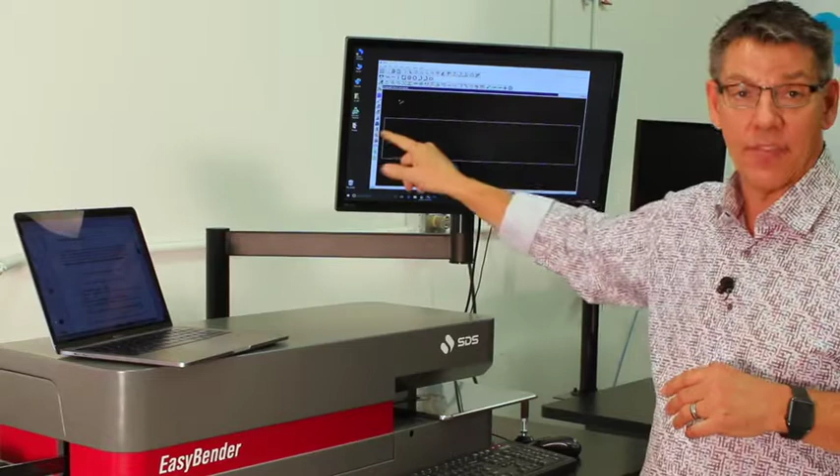It's a pretty simple process. What I've done here, and this rectangle that's up on the screen right here, if you don't have a rectangle that your CAD department's given you, you can draw one, and it gives you step-by-step instructions right here on how to do it. I did it really fast and got it up on the screen. And what we want is a 100 millimeter line. That's what we're after. We're going to get a line segment on your screen that's 100 millimeters long, and we're going to run that piece and then measure that, what the machine gives us against what it thinks it gave us against what it actually does.

So here's the sequence. We've already got the box up there, and you're just going to go ahead and run it like you would any part. You're going to go ahead and select your beginning and the end of your line segment and get your dialog box up that you're very familiar with when you're running a die.

You want to make sure you're straight cut, no miters, because the miter tip would get in the way. And very important, make sure you're not adding or subtracting any rule to the end of your cuts, so that it's 0, 0 on there.

No problem, go ahead and tell it that looks good. We're going to run it. And here we go, the machine is producing that part.

Now what you want to do is take the part that is supposed to be 100 millimeters and measure it. Get a pair of digital calipers, and we're going to go ahead and see what it gave us. Taking those digital calipers, we're going to measure that. And it did not give us a piece of 100 millimeters.

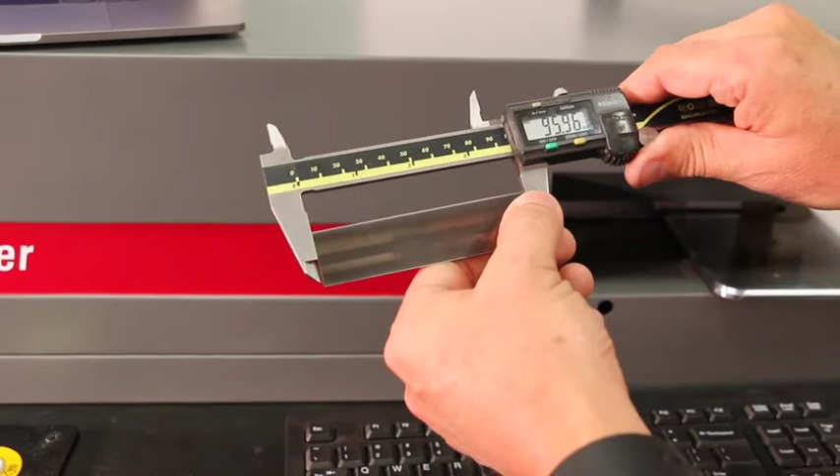Now, I went ahead and told it not to. I intentionally set it so it would be wrong, so I can show you how to fix it. So in this case, it is wrong. It is 95.96 millimeters, when it was supposed to be 100.

So what do you do when you find that it's this way? You keep that measurement right there, because we need to know that. 95.96. What you do next is go right over here to the configuration icon at the top of the screen, the little wrench, and you click on that, and you get your configuration dialog box to pop up.

Jump over to parameter 2, tab 2, and you want to enter in the password right here, SDS, into the keyboard, hit enter, and then go back to tab 1.

What you're looking for is right here in this section on the left side, the calibration pulse window. You want to go ahead and highlight over that and enter 100, because we're using a 100 millimeter piece.

And then in this dialog box right here, we're going to enter in what it actually gave us. So it gave us, as we had already seen previously, 95.96. So after you've done that and you've got the amount entered in that it gave you, you just jump down to the bottom right-hand corner of the screen and hit apply.

And then after you hit apply, then you go right next door and hit OK. And there it is, so it's taken what it thinks should be the correction.

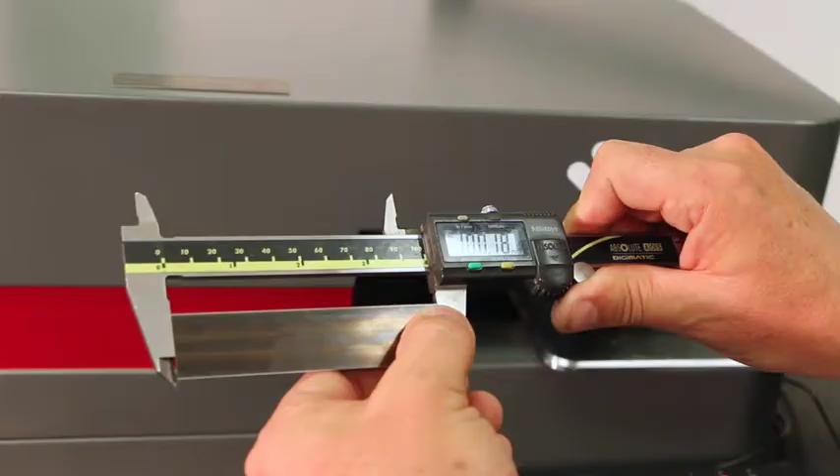We just run it again and see what it gives us. So in this case, we're going to go over here and run it again. All right, it's closer, but it's not exactly right. So I'm going to go through the sequence one more time to get it to zero in and get that right where it needs to be.

Okay, so here we go, we're going to do it again. I'll just talk it out loud real quick. Go to the configuration, go to tab 2, enter the password SDS, hit enter, go back to parameter 1, go down to pulse calibration, put in 100 because that's the piece it should have given us, go down to the window just below, right next to the run, and put in the amount it gave us, which was 100.18.

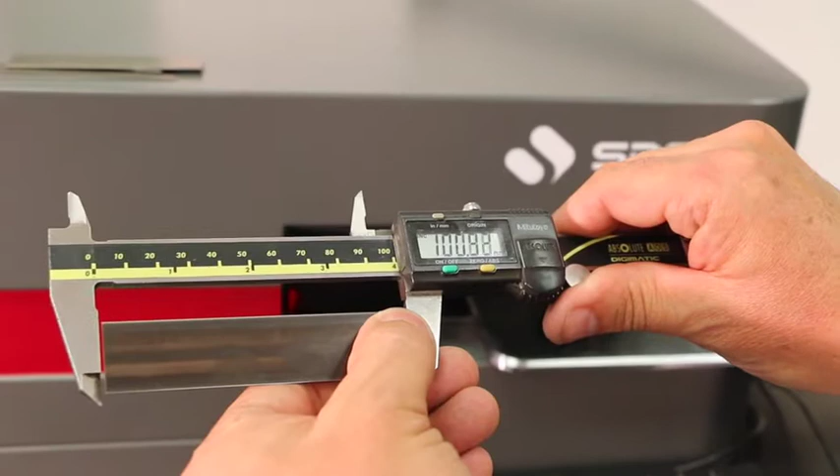And I'm going to hit apply in the bottom right-hand corner, hit OK, and there. Now we'll go ahead and run this again and see what it gives us. Okay, here we go, moment of truth. And get that in there, and there it is. 100 millimeters, spot on. This machine is accurate within plus or minus 5/1000ths of an inch.

Of course, we're dealing in millimeters here, but there it is, it's spot on, and that's how accurate these machines are. Well, there it is, that's it. That's how you do length calibration. Not too painful at all, pretty simple and very important. So let's move on to the next sequence in calibration.

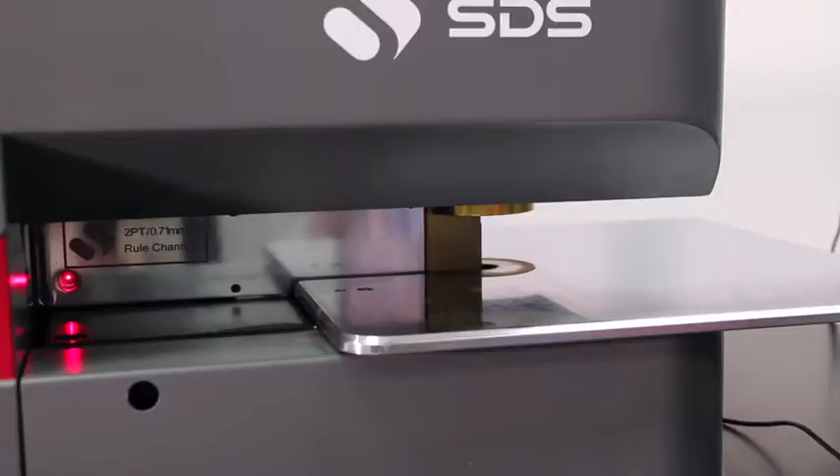All right, welcome to section 1.2, nozzle guide calibration. Now, the reason we do nozzle guide calibration is it all has to do with that nozzle at the end. What the nozzle guide calibration is all about is, the end of the nozzle over time is going to get wear on one side or the other.

And if that wear that happens over time is going to affect the distance, let me open up the lid here for you, the distance over to that miter station.

Let me get something to point with. To right here, that last tool, which is the miter, the distance between that tool and the edge of the nozzle right here, that distance will change over time. Because these machines are so accurate, we want to calibrate to that distance, because if that's off, you're going to have one leg of a bent shape shorter than the other as you're bending around. So we can calibrate for wear and that distance.

Also, if this block is not put in snug, if it's shifted over, that can change that as well. So anytime you insert and reinstall a tool block, you want to make sure that you're all the way over against the rule channel so that this distance stays consistent. Now in this case, we want to calibrate for any potential wear.

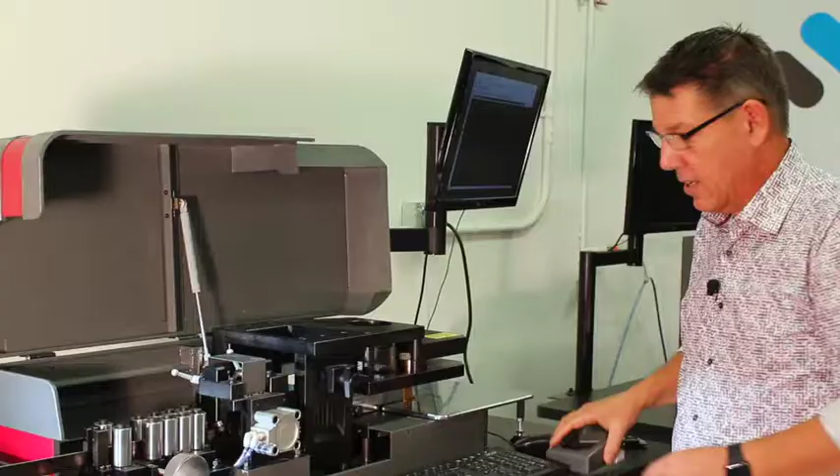All right, so let's just throw this all back together real quick, and we're going to run a piece of bent rule so that we can do, let me grab my other computer here. It's got my calibration manual on there. Get that opened up, and it'll give us our step-by-step directions.

Okay, so what we want to do is, and in the manual, it again tells you exactly how you can draw this square, and what we want this square to be is 30 millimeters by 30 millimeter legs all the way around from here to here to here, equal on all sides.

So we're going to go ahead, and what we want to do is we want to run a segment from here around this direction, and that's very important, that you start here, going this direction, going around and ending here. You're not doing anything with this line segment.

So here we go. We're going to go ahead and tell it to start our path here, going down to here, ending our line there. We'll get our dialog box, making sure we're straight cut, nothing here and here on length, adding or subtracting. And we're going to go ahead and run the piece.

And it's going to bend that shape for us. Paying attention to how it ran through the machine as it came through, this would have been the first piece off right here. This would have been the last piece out.

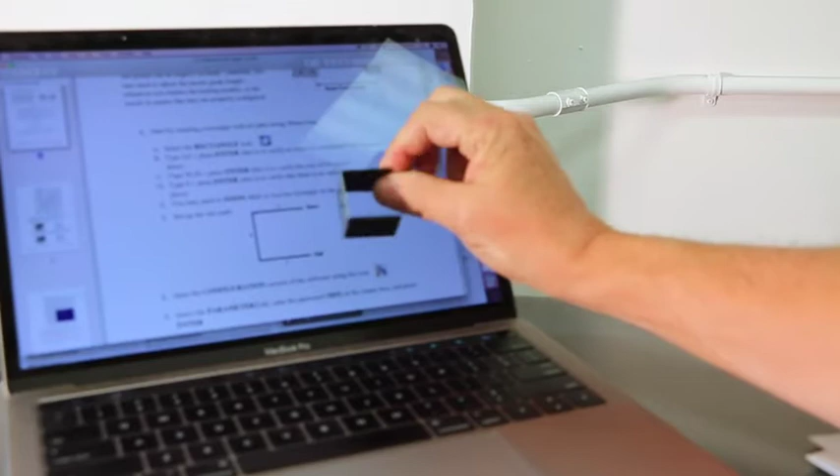So this leg, according to the manual, is section A, leg A. This is B and this is C. A, B, and C. Now that matters because as you read the manual, it's going to talk to you about legs A and C. B doesn't really have any concern to us, but A and C do.

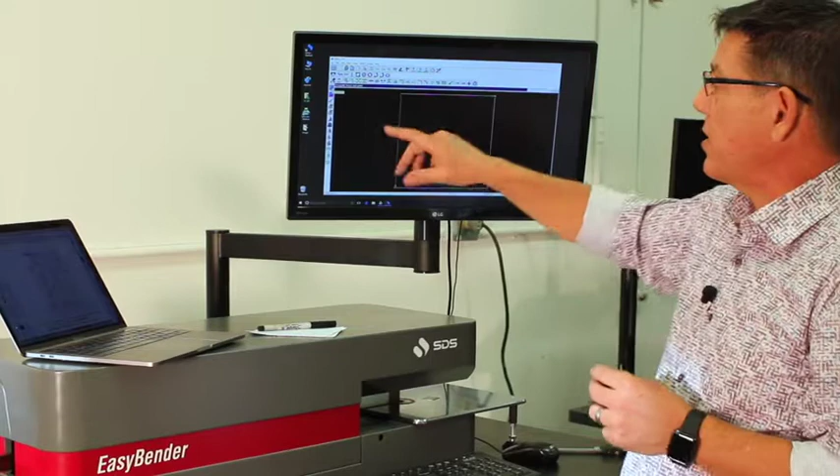All right, now that we've got the piece run, all we want to do is go back to our configuration, just like we did before when we ran the length calibration. It's the little wrench right there. Get that to pop up. You got to go through the same sequence every time.

You got to open up the software. You got to go to parameter 2 right there. Go down to the password, SDS, enter, go back to parameter 1, and we get the screen open. And right here in the configuration window, right here in this little section is the nozzle guide, left and right. So you've got these 4 dialog boxes right here inside of nozzle guide, and we're going to go ahead and get started inputting some measurements into these windows.

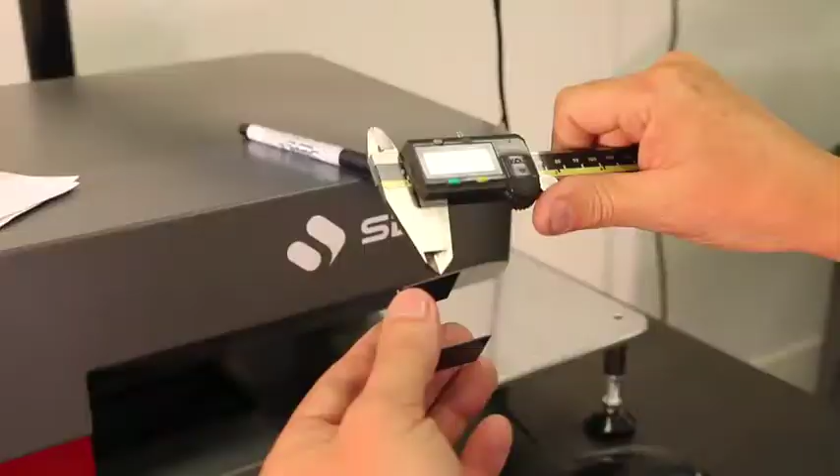Okay, so what we want to do is take leg A and we want to measure that first. And you take the back of the rule here, you put it into your caliper, and you just dial that over. We want to hold that tight right there, and we want to see what that leg A measures out to be. And it measures out to be 30.43. So I'm going to write that down.

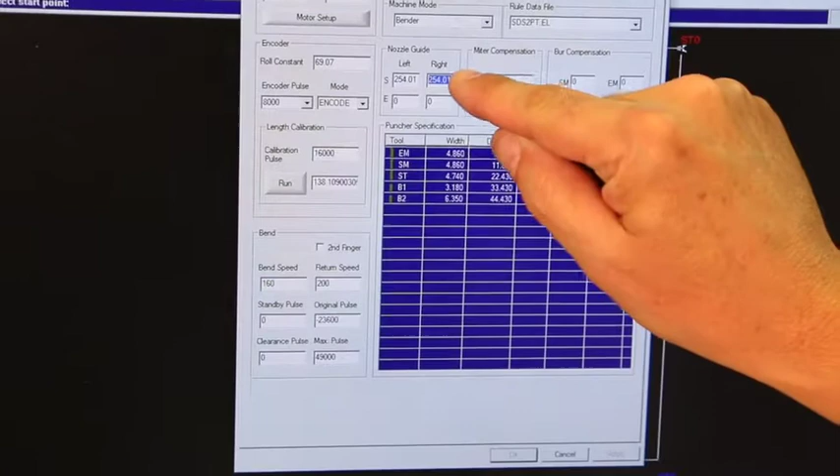30.43. I'm going to go ahead and enter that value right here into this section, the right side of that window. Let me get out of the way so my fat finger's not in the way.

30.43. Now I want to go ahead and measure the other leg. I'm going to take this same pattern, hold the calipers against there, and measure leg C, and that came out at 30.28. I'm going to enter that into the dialog box right below where we just were.

So I should have wrote it down - got to write those things down. 30.28, and there it is. Then all I have to do is go down here and hit apply, and it adjusts the numbers right here.

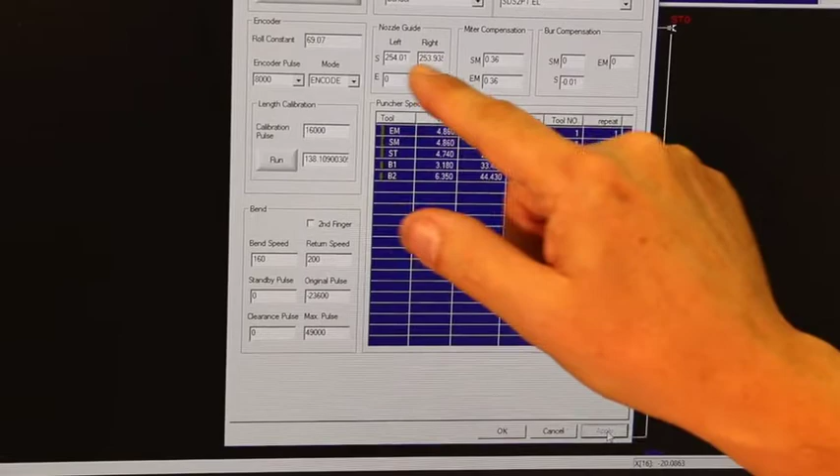The last thing you have to do is after you've hit apply, you need to come up here and check these two boxes, and manually change the data underneath whatever's in the word left. The numbers under left must match whatever is on the right, and it doesn't. So I'm going to highlight whatever's on the left and manually type in whatever's on the right.

In this case, that would be 253.935. So we've got that first segment done. We're going to rerun it and see how close we got. We've already got it all plotted out, so we're just going to run the same piece again and see what we get.

Okay, again remembering which piece came out first, right here, that's leg A. If we're spot on, those two legs are going to be the same distance. This one's 30.33. Moment of truth, flip it over, do the last leg out, leg C. That's 30.29.

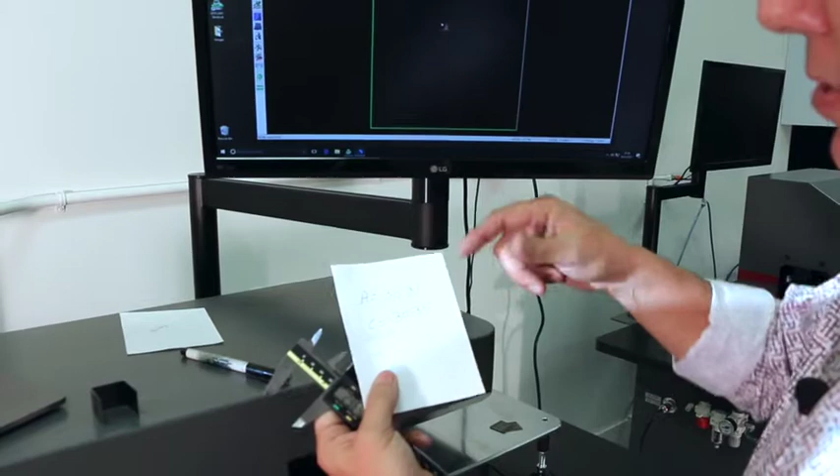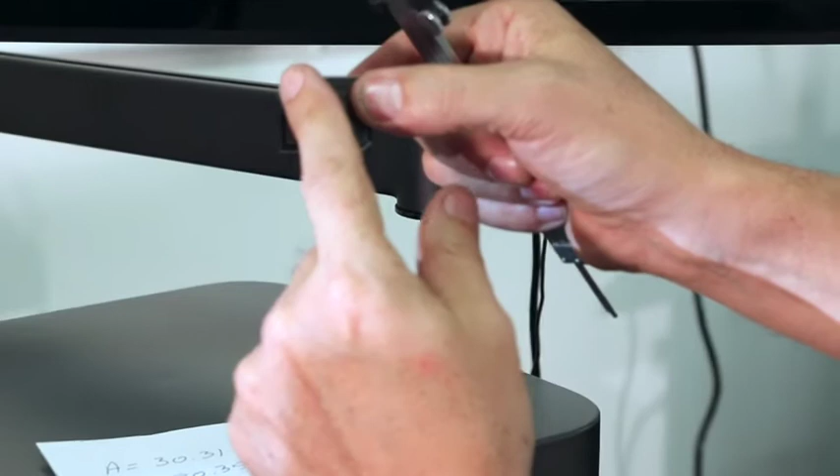I neglected to give you one important tip - when you're measuring these, you want to measure up as close to the cut bevel as possible. You don't want to measure down at the bottom of the rule, because in some of your tool blocks out there, there's a slight taper going, I'll over-exaggerate, going this way. So it may not be an exactly straight cut, and that's by design. If you're going to get this right, you want to be measuring at the top of the bevel on A and the top of the bevel on C.

All right, let's go back into our configuration, go to parameter 2. Let's get our password back in there, SDS, enter. We're going to hit back to parameter 1, and there we are back to our nozzle guide, left and right.

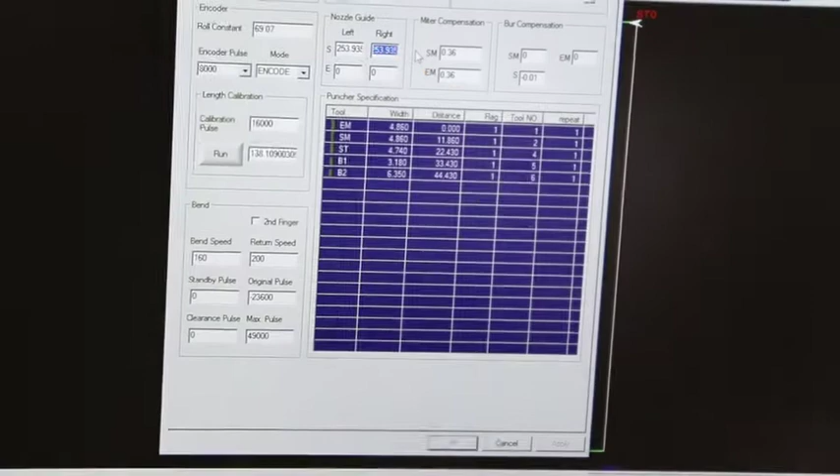We're going to go over to the right side and put in what A was, and A was 30.31. We're going to go down here underneath it and put in what the value C was, which was 30.35, and we're going to hit apply.

Going back up here, again, remember these two values need to match. We need to check that the left value matches the right, and it's really close, but not quite right. So we're going to highlight the left value and type in what we see on the right, and in this case that is 253.955. Go down again and hit apply, and okay, we're done.

And we'll check it one more time. All right, remembering how it came off, this is A, this is C. So let's go ahead, measuring up by the top of the bevel, just to make sure we don't get that taper in the way.

Okay, A equals 30.31, and C is 30.31. It's spot on, exactly right. Leg A and leg C now match.

This is important - if you can imagine, when you're going to knife a die and want to put this piece up against another piece of rule, you don't want one leg shorter than the other. This is an accurate machine. Let's move on to our next section.

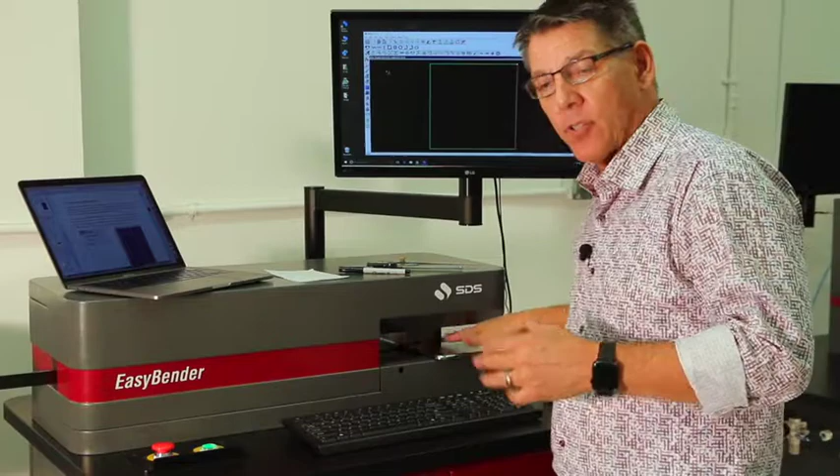Now, the reason we do a center machine origin is there's wear on this tooling. Specifically over here by the nozzle, you've got those bending posts, or fingers, that come up and down next to the nozzle that cause the bender to bend. Now over time, those fingers get worn from tapping the rule, so it affects where the origin or the center of the machine is.

So the gear set can wear over time. The nozzle gets a little worn on one side. The fingers can get a little worn. Maybe the left may wear a little differently than the right side if you have the tendency to bend one direction all the time. So you can kind of get everything back on center.

Now this is really important to do first before you do your arcs, your radiuses, and your angles. You need to do this bend origin first. Now the ideal way to test the machine origin is to bend a piece of rule 30 degrees to the left and 30 degrees to the right. So here's how we find out how to do that.

What we want to do is go over here, right up here to settings, and we want to do that pull down on settings, and then on the third one down it says teach, and we're going to hit teach, and there it's going to pull up this field, and you want to look right here.

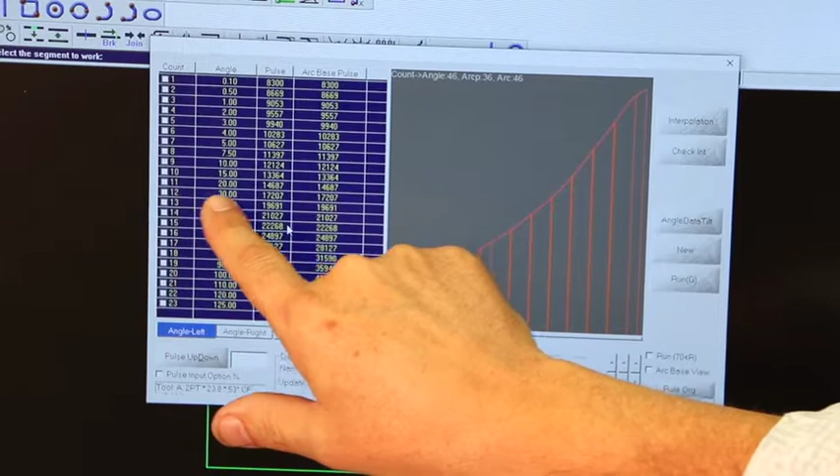We're after the 30 degree, and right there, we want to write that number down in the pulse column. So 30 degree pulse, we're going to jot this down, is 17,207. That's the pulse that the machine is currently using in order to produce a 30 degree to the left and the right. Okay, we're going to go ahead and close this down because we don't need it anymore, we got the number that we need.

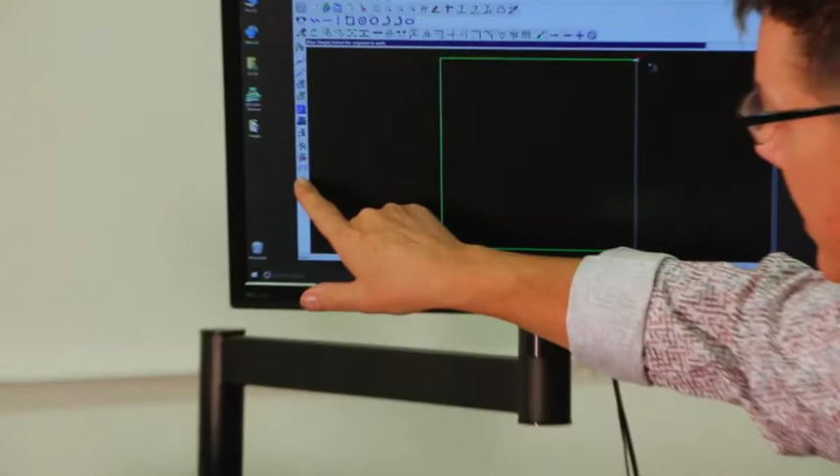We're going to close that dialog box. Now next, let me jump over here to our book, and it tells us what we want to do is go to the manual operation. And where you find manual operation is over on the left-hand side, all the way, second from the bottom, is a little green gear. You want to just tap that green gear right here, and it pulls up this dialog box.

So right here, over on this side of the dialog box, is this area called Bend Origin. And what you want to do is just hit Bend Origin, and it's going to ask you if you want to save the origin data. Just tell it yes.

Okay, now that we've done the Bend Origin, what we want to do is head right over here next to the other side of this dialog box, and it's got this area that says Test Bend. And just below Test Bend, it says Test Pulse. And this is where we want to enter in that number that we copied down earlier for the 30 degree pulse to the left and the right.

So what we do is highlight that, and we enter in that number, 17,000, and your number may be radically different, so don't use my number, use the number that was on your screen, okay? And so you put that in, and then jump down right below it, and it says both. And you hit that icon, both, and it's going to put two pieces out, 30 degrees, one to the left, one to the right.

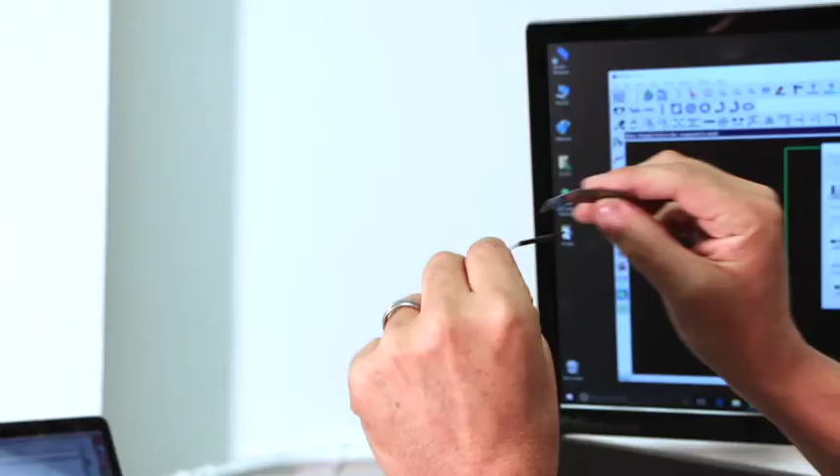You got to pay attention to which one comes out first. Here's the first one, here's the second one. Now what you want to do is take these two pieces and lay them on top of each other, and then pinch them down here and see if there's any gap there, and there is. I'm sorry, if it's in line with the screen, I can't tell that it's not in line.

So I'm going to step forward. Yeah, okay, alright, I always try to stay in the same spot. Now can you see that? Yep, alright, so start over. Ready? Okay, here we go.

So here we go. I'm going to take the two pieces, and I'm going to lay them on top of each other, and I'm going to pinch them right here, and I'm going to hold them together and see if it's perfect.

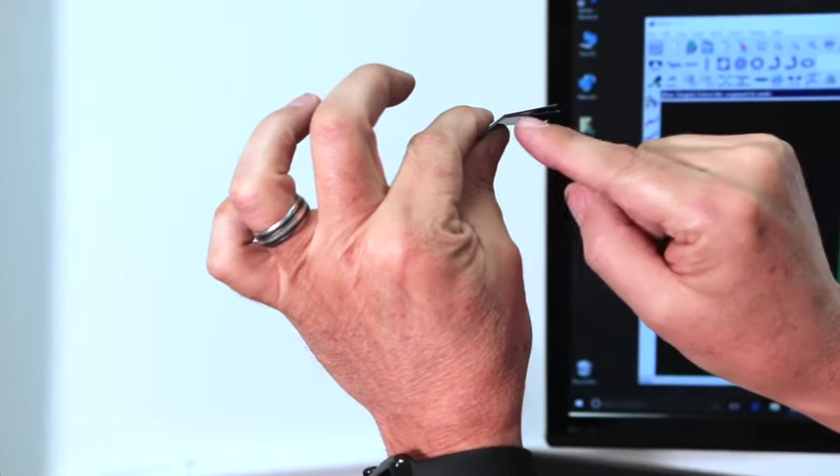They'll be laying flat on top of each other, this side and this side. And look at that, they're not. It's off by that much. That's almost 1/8 of an inch difference right there. You can also see it there, it kind of rocks like a seesaw back and forth. That's not good, that means it's going to be off left to right, and we can fix this.

Let me show you how. Okay, now we're going to do a little bit of math here, and this is about as hard as anything we do in the calibration sequence gets. So what we have to do is take these two pieces that we bent.

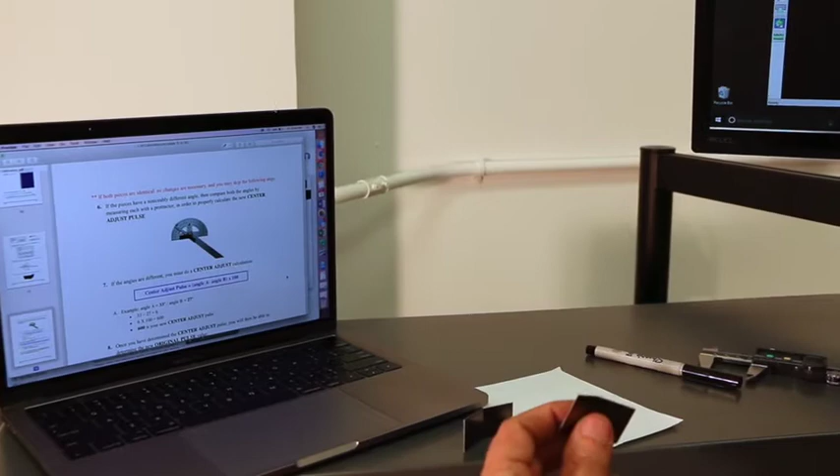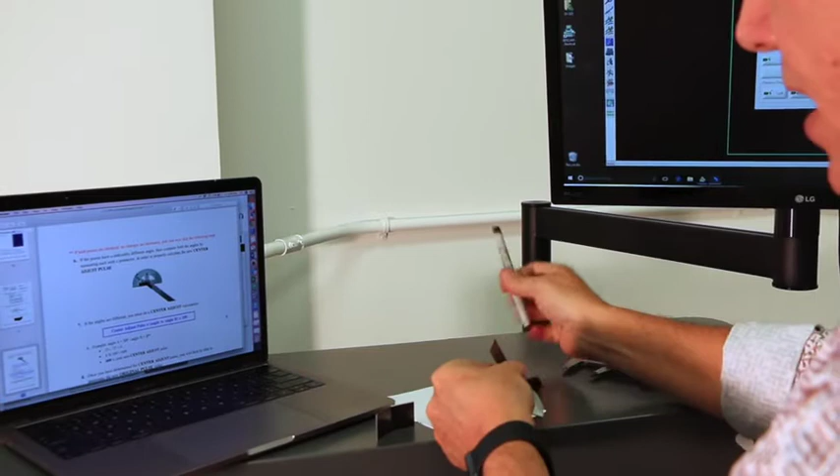What we want to do is find out, it's supposed to be 30 degrees, and clearly it's not because they were off. So we want to take this protractor and measure what one of the legs was, and that is 25. You may not be able to see that, but it's a 25 degree angle. So I'm going to jot that down, angle A equals 25 degrees right there. Then I'm going to take my other angle and measure that.

And that is 30, so angle B equals 30. That's currently what I'm getting. Now let's compare that to the sample that's in the manual.

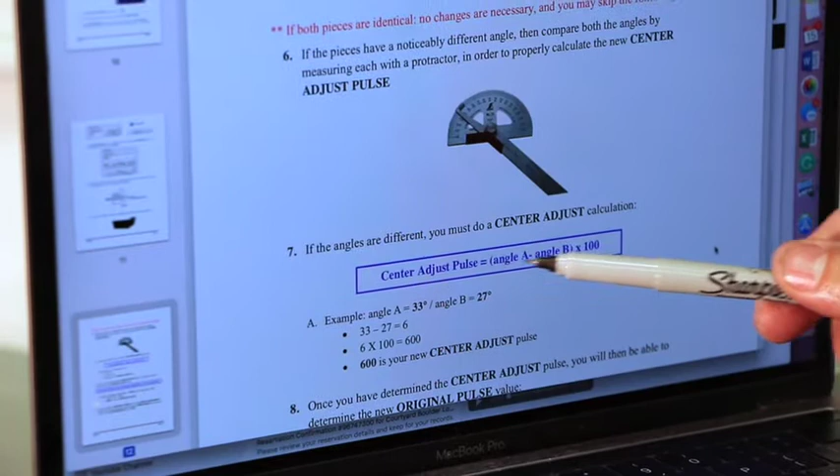And here's the formula. Center adjust pulse, this is the formula: angle A minus angle B, and then you multiply it by 100. Here's a sample right here using some measurements different than the ones we just got, but let's look at what's in your manual.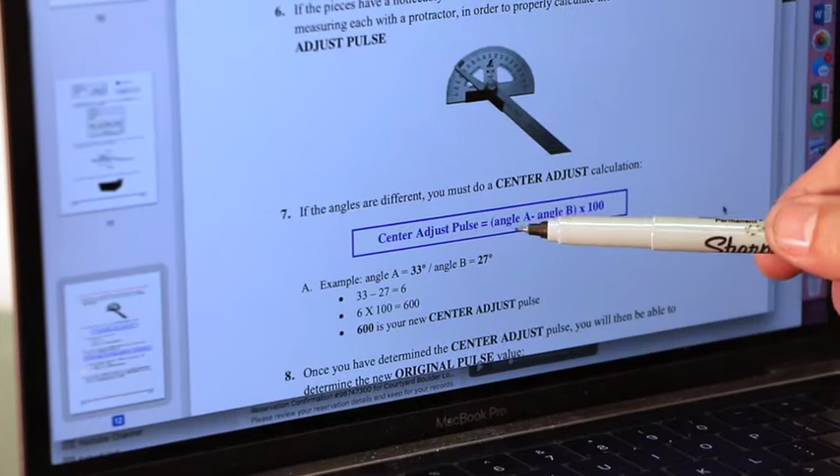In this particular case, angle A equaled 33, angle B was 27. So using this formula, 33 minus 27 equals 6. Then you multiply by 100, so 6 times 100 is 600. So in this case, 600 is your new center adjust pulse. You're going to want to make note of that 600.

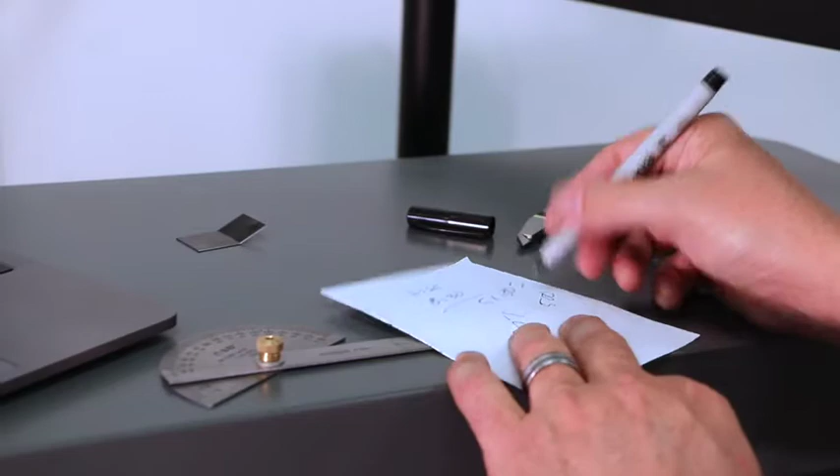So here we're going to go to the next step. Once we've done that math, and I hope that makes sense between this and the book, you're able to see what we're talking about. Of course, we don't need that number anymore. Here's our new math. Okay, so looking at our math, we know that A equaled 25, that was a 25-degree angle, and B equals 30, there was a 30-degree angle.

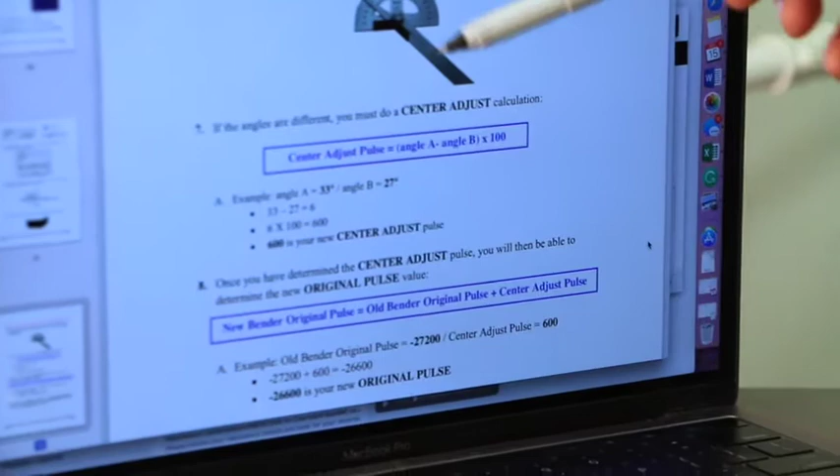Now, if we look here in our training manual, this is as hard as this will ever get as far as math is concerned. So there's some samples, and I'm going to walk you through the sample in here, and then we're going to look at it compared to what we actually did. But let's look at the sample here. So here's the math formula.

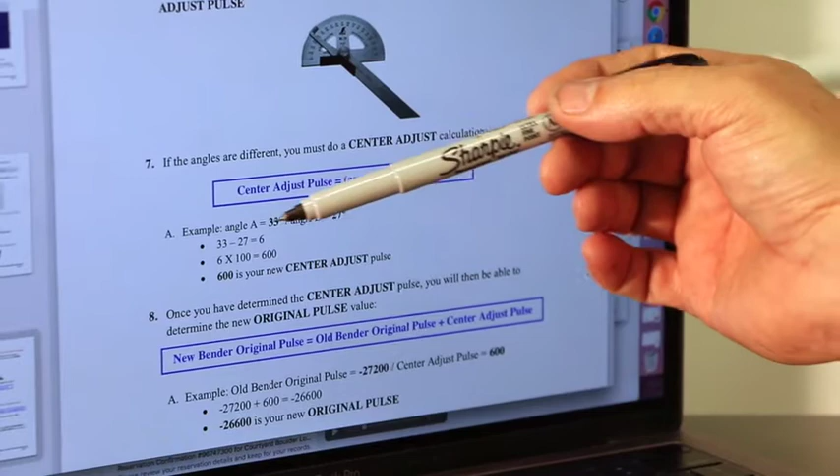The center adjust pulse, and here's the formula, angle A minus angle B times 100. Now you're going, what does that mean? Well, let's look at their example. Angle A, which their first piece out that they measured in this sample would have been 33 degrees. Angle B was 27. So following this math formula, you would take 33 minus 27 would be 6. So again, angle A minus angle B is 6 times 100. The new value 6 times 100 equals 600.

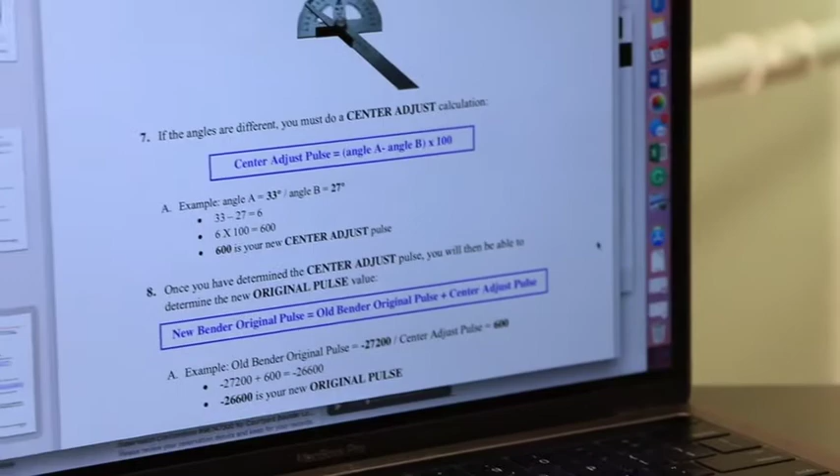And you've got your new number, 600 is your new center adjust pulse. That's what's in the manual. Let's look at that compared to what we just did. So by doing it twice, hopefully it makes sense.

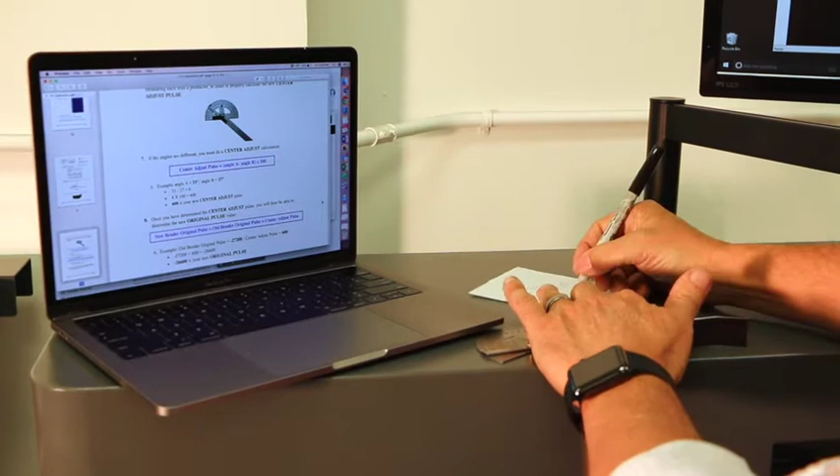So you know that we measured A at 25 and B at 30. So following the math, 25 minus 30 is actually negative 5. And then we take negative 5 times 100, and that's going to give us negative 500. And that's our number that we're going to use to do a center adjust pulse.

Okay, so now here's what we do. We take this new number we've got, which again in the book, this is called our center adjust pulse. This is where we're going to change it to try to fix that.

Go back to the dialog box, it should still be open on your screen, and right over here in bend origin, you've got this number showing. My number here is negative 23,000, and I need to add negative 500 into the number on my screen. Your number will be different, but whatever value you got, you're going to add that number into the value on your screen.

So in my case here today, I want to go ahead and increase that number. I'm going to backspace it out, and now my new number is going to be negative 23,500 because I'm adding negative 500 back in. And there you go.

I can go ahead and hit bend origin, and now it's really important you want to hit save origin data, yes, and it's going to now produce a piece to the left and the right, checking our bend origin. I didn't take you all the way through because after you hit bend origin, you have to jump over here and hit both, tell it to run both. So hit bend origin, and then jump down here and hit both. Now it's going to do one to the left, one to the right.

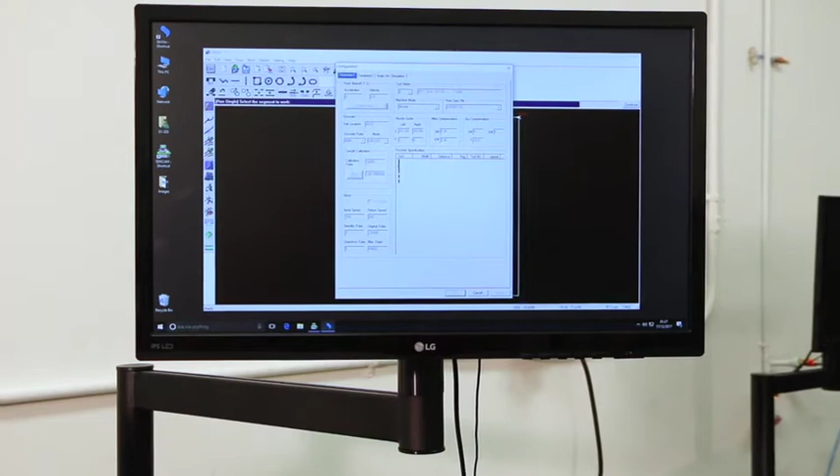So here, let's take a look at this. What you want to do is click right here on the configuration tab with the little wrench, and it's going to pop up the familiar configuration dialog box. So you're going to go over to parameter 2, and again put in the password we're used to, SDS, enter, and then you go back to parameter 1, and here is the section that contains the information we're going to be working with when we do rule calibration or introducing a new rule EL file. You can see right there, .el.

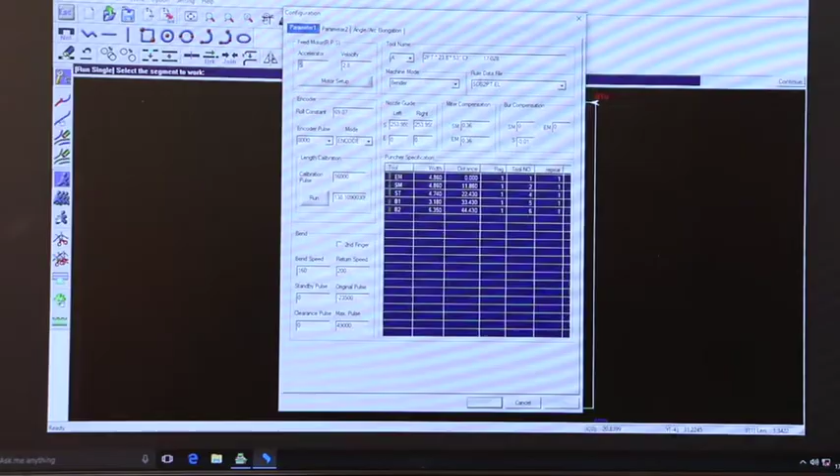Currently, this tool block A is associated to the 2-point rule, and it's using a rule data file of SDS 2-point that came straight from the factory. Let's say we want to introduce a new type of 2-point rule, maybe a hard body. You want to make sure tool block A, the 2-point block, is chosen, and it is.

So you'll close out and go back to Settings, then Teach, the third one down. You'll see this screen pull up showing the 2-point EL file we found in the other dialog box, and tool block A. You can't change any of these here, it's just verifying what we saw on the other screen has pulled in. But here's how you get a new database.

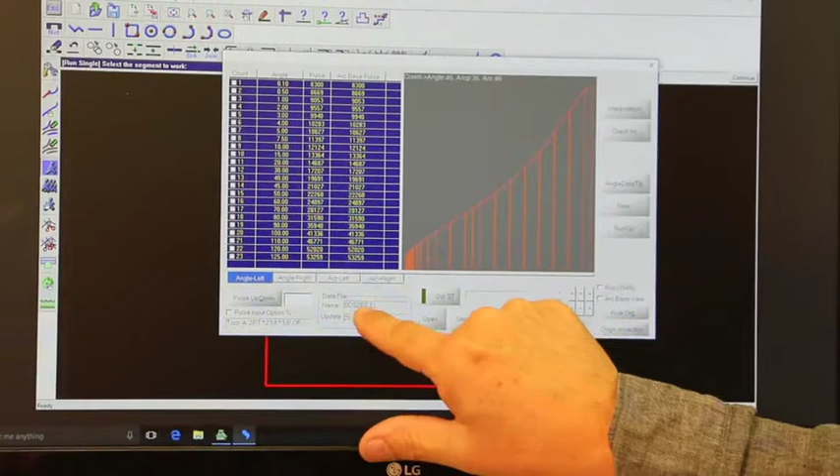You go right here and click Save As. You're taking all of the pressure points from this existing file and doing Save As, now you can rename it. I'll back this out and call it 2-point hard, 2-point hard.el - you can name it whatever you want. I'll call it 2-point hard.el, hit okay, and there it is. It's now saved as a 2-point hard EL file, and I can begin to calibrate to this new rule database I've just introduced.

Welcome back. We're going to continue on now with teaching the machine about angles and arcs. We just got done looking at how to introduce a new EL file, so here we go, we're off to the races to get started.

Here's something familiar I just got done teaching you. You always want to verify before starting a calibration of angles and arcs that you're really calibrating to the correct EL file, the correct database. Nothing is more frustrating than going through a whole calibration sequence and calibrating the wrong EL file. So go in real quick, pull up the configuration, and make sure the current file selected is the one you really want to calibrate to. Don't assume the last person left it the way you want it. Check that, and if everything looks good, cancel out. If it's not right, follow the sequence I showed you to select the right one.

Now when we're ready to go, we want to teach it. Come up to the top to Settings, do the pull-down menu and go to Teach, because now we're going to teach the machine how to do angles and arcs with the adjusted pressure to the EL file, the database we want to go with. So we're doing Settings, pulling down to Teach like I showed you, and this screen pops up with the right EL file named.

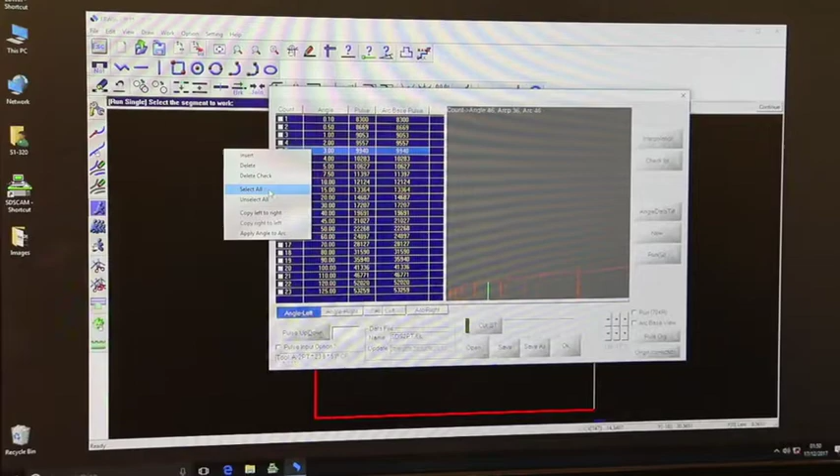Here's a quick tip: you can right-click with your mouse anywhere in the blue area, and it'll pull up this dialog box. Just hit Select All - noticing, of course, by default it started with all the angles going to the left, and this is what we're going to do since it opened first. You do Select All and you can see it put a check mark by all of the various angles from 0.10 all the way to 125.

Now, you may not want to run that tiniest one and the largest one - you can unselect those and then just hit Run, and it's going to run all of these in order. It's really important that as they come off, you keep them in order, because we're going to measure them with our protractor and input what it actually gave us, so we want to catch them off the machine in the same order.

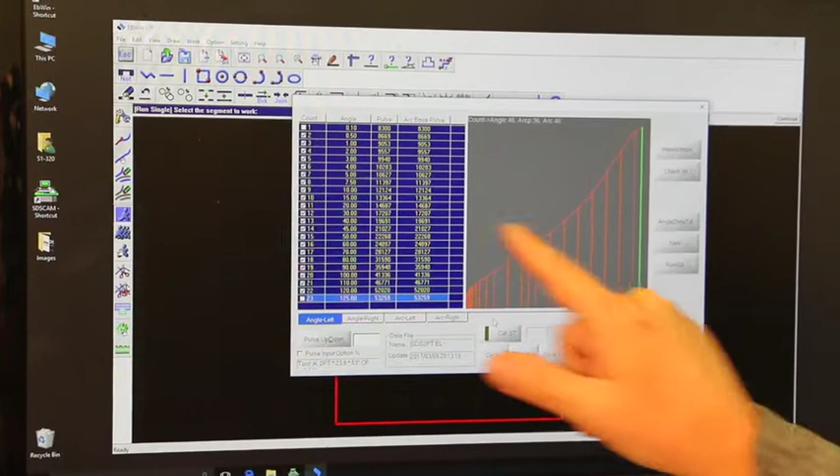Coming over here, I'm going to hit Run, and they're going to come out down here by the nozzle. You'll notice the first few coming out aren't coming out as angles at all - they're coming out as radiuses, and I'll explain why in a moment. I'm going to catch these coming out in order, and in just a moment it's going to stop doing this multiple hit and give us simple angles. There they come, just one-hit angles. Again, I'll explain why it's different in just a minute.

Each one is sequentially more than the last because it's adding more pressure, creating what it thinks are the correct angles. And those last bits come off quick, and there they are, all in order, just like it produced.

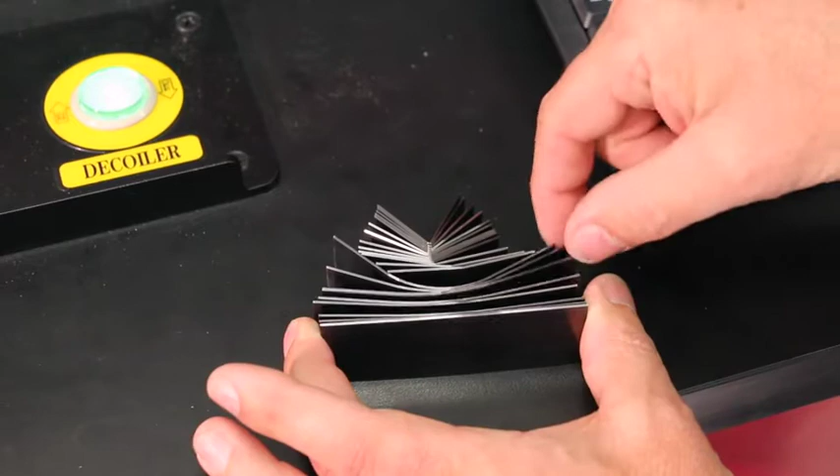What I've done is I have now laid here on this bench of the EasyBender the parts as they came off, and I told you I'd come back and explain why the first 10 pieces off are bent like this in the shape of a radius rather than like the remaining pieces in the shape of just one bend. The reason is this first one off is trying to give me a 1 degree angle.

And if you could imagine on the protractor here trying to read a 1 degree angle, like I'm going to put it on 1 degree right there, that would be very hard to read. You couldn't really get a reading.

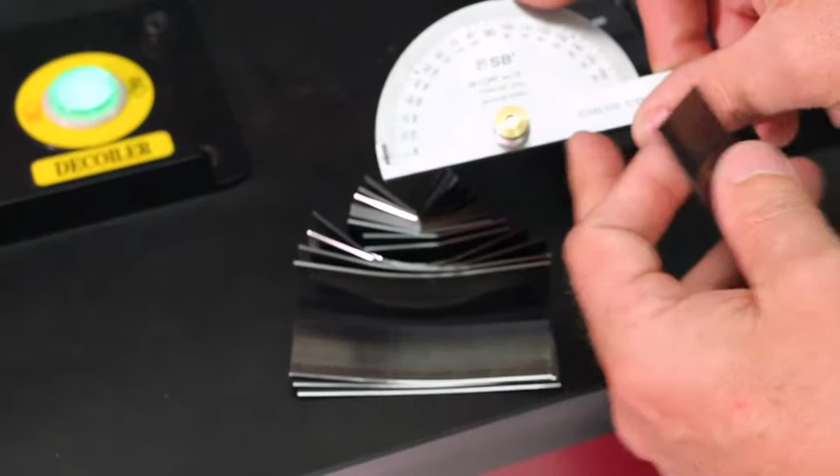So to help us, what it does is, you probably won't see it on the camera, but there's 10 sequential hits of a 1 degree angle. So 10 hits of a 1 degree angle will actually register. Of course, 1 times 10 is 10, so it's going to read as 10 degrees because it's giving me 10 hits of 1 degree. So my human eye and my human hands can hold this to get a measurement.

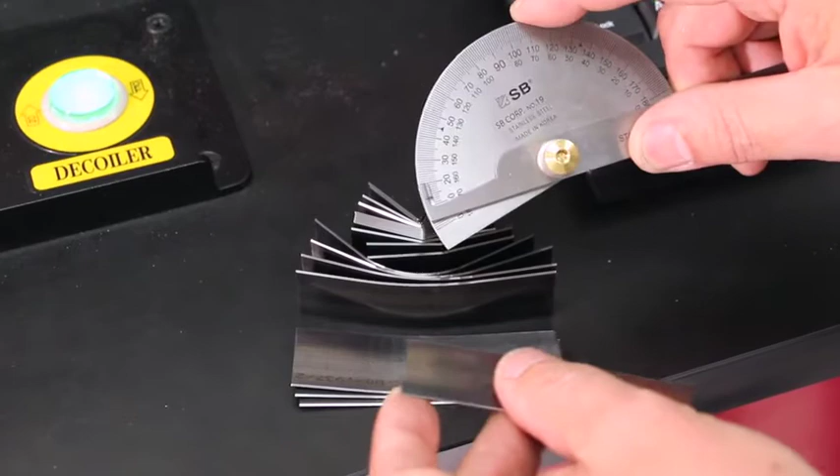Now it follows that pattern for the first 10 pieces off. Once it gets past that, then it goes to single hits. So that's why the beginning looked different than the end.

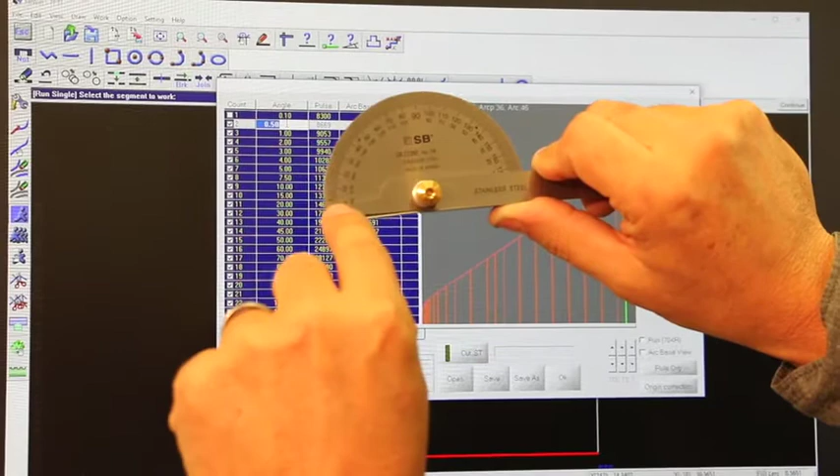Okay, here we go. I've got the first one off, and it's 0.5 on the angle, and I'm going to hold it up. Now remember, it gave me 10 hits of 0.5, which multiplied by 10 should read here on my protractor as 5.

But actually, I'm looking at it, and I'm holding with my thumb here and allowing the protractor to come down and rest on this leg without any pressure, and it's reading 3. So what I want to do is go into my screen, and I don't want to enter 3, I want to enter 0.3, because remember now we've got to divide by 10. 0.3, and I hit enter.

And now it will make the automatic calculations to change the pressure the next time I come in and run the sequence again. It automatically took me down to the next piece to measure. So stay right there, don't go anywhere. I'm going to grab the next piece and hold it up.

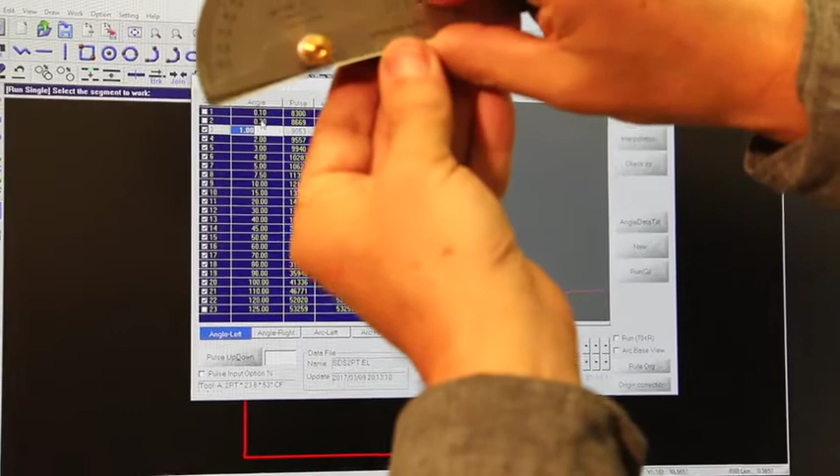I'll show you again, putting pressure with my thumb, letting it come down, and it's 10 hits of 1, so that should read as 10 on here, and it's actually 5. So what I want to go in and tell it is, nope, you gave me 0.5, because I divide by 10. There we go. It gets easier as you go on, once you get past all this having to do 10 hits and dividing.

But I'll do it a couple more times so you can see it. The next one is a 2-degree angle. Hit 10 times it should read as 20. And it's reading as 8. So I'm going to go in here and say 0.8.

The next one's a 3-degree angle. Should read as 30. It's reading as 13, so that's going to be 1.3. Again, dividing by 10. Next one, a 4-degree angle.

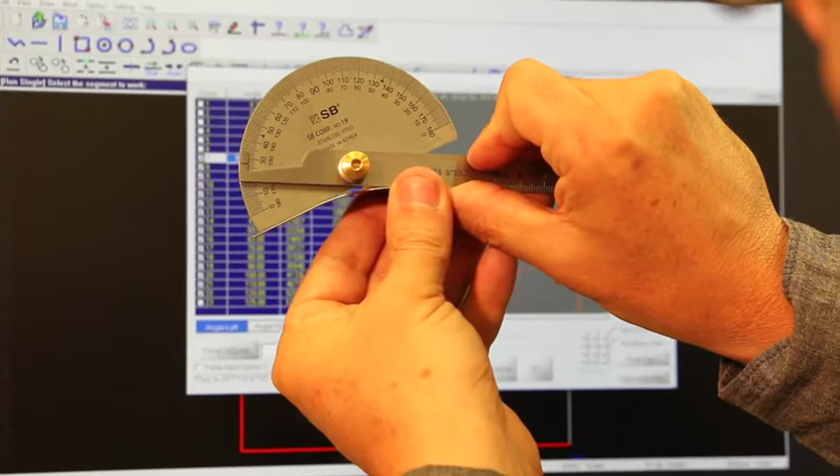It's reading as 20, so that should actually go in as 2. The next one is a 5 degrees. It should read as 50. You get the idea, it's just the same thing over and over again. It reads as 28, so that'll be 2.8.

This next one's a little tricky. It's a 7.5 degree angle, so that should read as 75. And it's reading as 50. So that's going to be divided by 10, it's going to be 5.

And we're almost done with these tricky ones. I'll show you how easy the rest of them get. This one here at 10 should read as 100, and it's reading as 74, so that's going to be 7.4. Now we're done with those multiple hits of 10 that we've been dealing with.

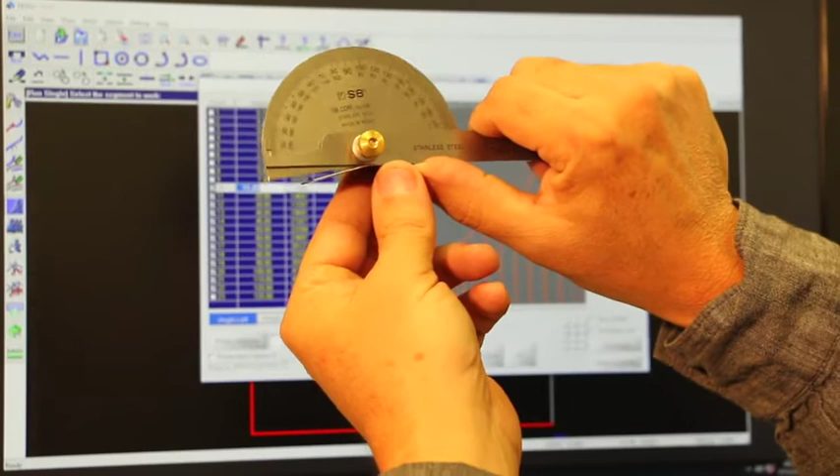Now that we're past those sequential hits of 10, we can grab it, it's a 1 hit now, and it's 15-degree angle. It knows that's what's next, so this one will be easy to read. It just should be read 15, right? And so I go and I hold it up, and it's actually reading 13. So I go ahead and say, nope, 13. There's no reason to divide by 10 anymore.

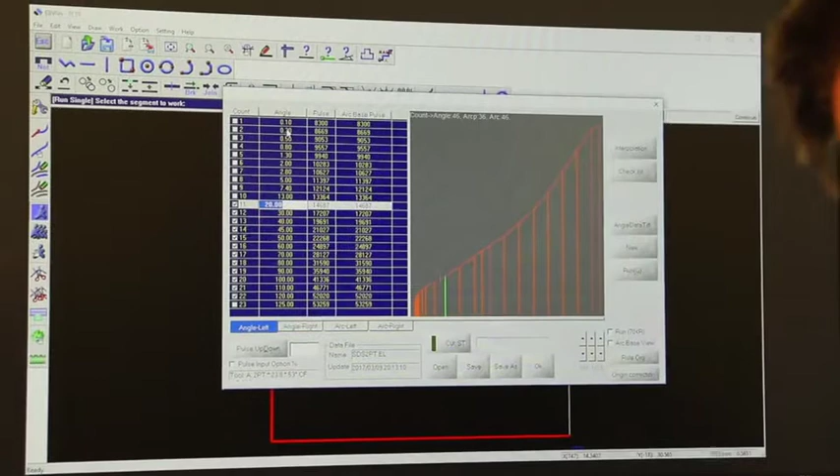So then I take the next, it should be 20, and you can see how easy this is from this point. You're just reading what is and telling the machine what it actually gave you. And this time it gave me 18 instead of 20. So you can see it's consistently under pressure, and it's just teaching the machine that this rule type is a little bit harder. And I'll go to 30, and it's reading as 28. You get the idea. We'll go ahead and pause the camera from here, and I'm going to finish this and bring you guys back in just a minute.

All right, I've got my last one in. I've gone through the whole table, and I've entered my last one right there. Hit enter. Then, this is really important, this next step. If you forget this, you're going to lose the good changes you just made. You've got to go right here after you get done entering your last one.

Right here at the very top, on the right-hand side - it helps if I get my directions correct - is this button at the top, interpolation. You want to go ahead up here and hit that, tell it yes, and then it takes all of what you taught it and it finally dumps it in, or applies it to the database. Then the last step, of course, is you hit save right here to save the changes, and then you're ready to move on to the next table.

What we've just done is the left angles. Now we need to do the right angles, because one finger may wear differently than the other finger. One side of the nozzle could wear differently than the other side of the nozzle, requiring a different set of pressure. This gives us really good accuracy bending left to right when you take the time to calibrate both sides independently from each other.

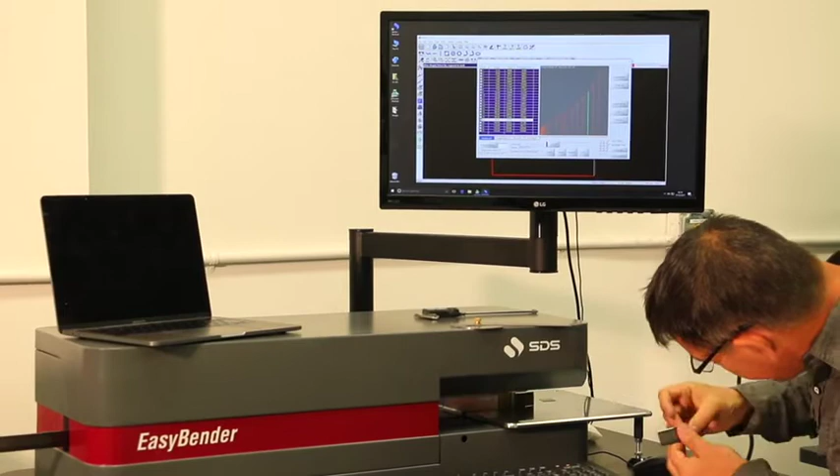So here's my three pieces that I asked it to run. Again, 10 degrees, 10 hits. It should read now as 100, and it's reading as 95, 9.5. It's not quite right, so I'm going to go here and do 9.5 and enter.

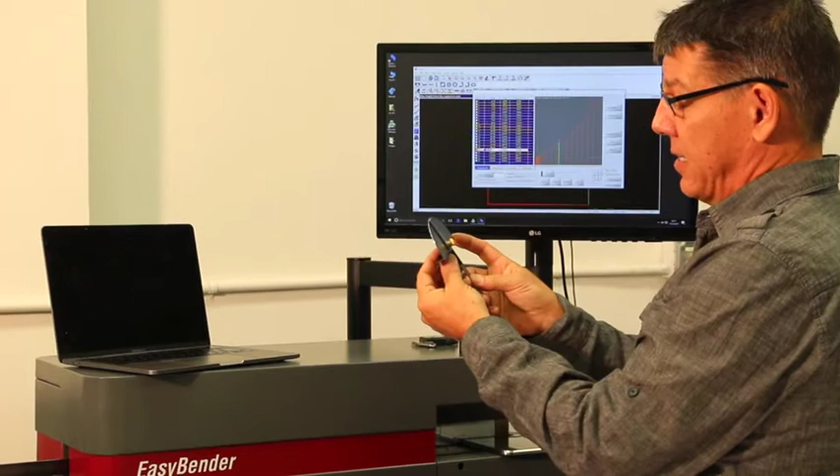Tells me I'm pretty close, but not spot on. Now it automatically drops down to the next one because it knows that I asked for it, and it should be 45, and it's exactly 45. So that one's good, you don't do anything with it, you can accept it. To get it to go down to the next one, you just click it, and go to 90, and read the 90, and it's spot on. It's exactly 90, and so we're good.

I do a little adjustment here on this one, but these two are really, really good. So as an operator, you have to decide, is that close enough? Is it good enough for my shop, or do I want to zero in these other ones a little bit better? It's pretty clear that the 45 and the 90 were spot on. It might be recommended at this point that you run everything, those first 10, because they were a little bit off. But again, that's your judgment call to make as you calibrate your machine.

Okay, now that we've run through the entire database, we've done interpolation, we've done save, what we want to do is do a spot check on how well the machine corrected itself with what we put in. Now there's a couple ways you can do that. If the machine was way off, it could be well advised to go ahead and just run everything a second time. But if you were close and you just kind of want to spot check, you can do that by going over here, and rather than selecting all, you can just select the couple you want to do.

In this case, I want to check the 10 degree angle, I'd like to check the 45, so I just go to the box right there next to it and check those, and I think I check the 90. A 45 degree and a 90 are pretty important in the making of a die, so we're going to go ahead and check those. I'm going to do 10, 45 and 90. I've got them selected, so then I just go over here and hit run, and the machine's going to only run just those three pieces for me.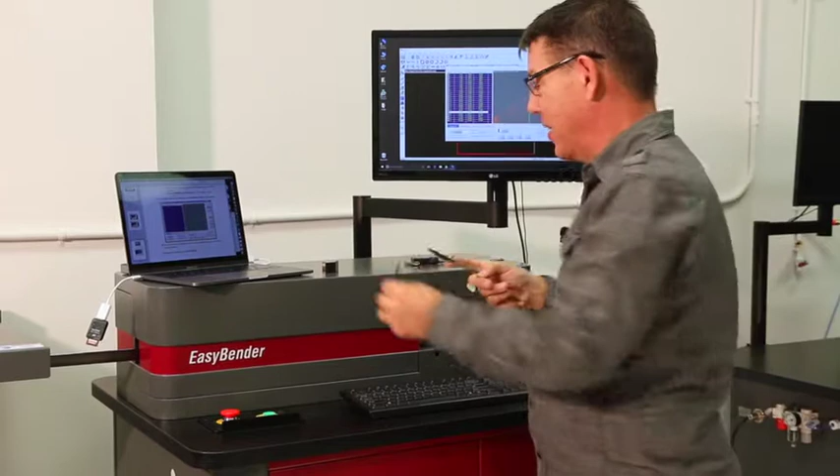So that's close, that's within tolerance right there, so that one's good. This one here, I'm going to go ahead and check the 45, and it's spot on, 45, just like it should be. Check the last one, 90 degrees, see how well it did, and there it is, exactly 90 degrees.

Had any of them not been right, I would have just followed the same pattern as before. I'd enter in what it gave me, hit the enter key on the keyboard, it'll jump you down to the next one. And every time you make changes, you have to go back and follow the same sequence of hitting interpolation and then save. But in this case, we didn't make any changes, so there's no reason to do interpolation and save again. We're ready to move on to the next side.

Okay, we're ready to move over and check the angles going to the right. There's one more step we need to do that I failed to mention in the last video. Before you move over to do the angles to the right, you want to go ahead while you're still in the left view, right-click anywhere in the blue area. It's going to pull up this dialog box, and what we want to do is select the one that says Copy, or I'm sorry, where it says apply angles to arcs.

You want to apply angles to arcs. What this is doing is taking all of the angle pressure we just introduced and applying it over to the left arcs. Here's why.

These arcs, or radiuses, are simply sequential progressions of angles in small little bits. So you're taking the good work you've done and applying it over, saving time when you get over here to calibrate the radiuses or arcs to the left.

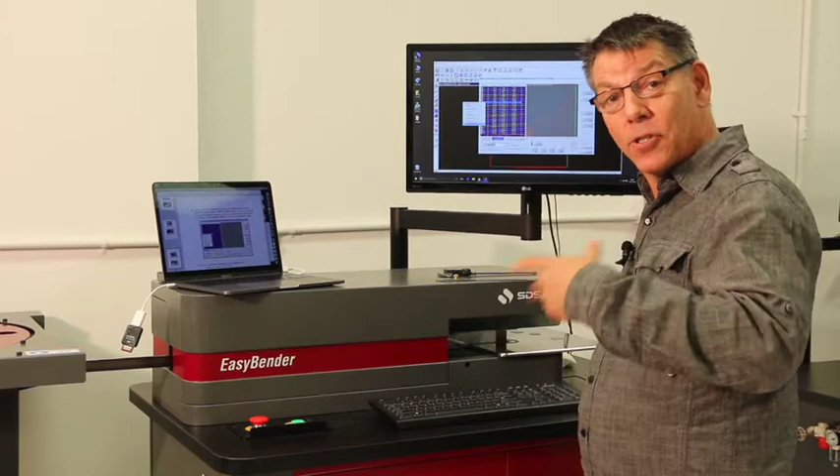I wanted to apply angles to arcs, so we take all this good data I just did and move it over to the radiuses, the arcs. I'll tell it apply angle to arc, tell it yes, please do. Now my angles, both left and right, are all done, and I'm ready to move on to arcs. Let's do that.

Arcs again being radiuses. Go ahead and click on the next tab over and it'll pull up another dialog box with this database in here.

We follow the same pattern. We go here and right click anywhere in the blue, and it'll pull up that dialog box, and what you want to do is select all. You want to run all of these radiuses.

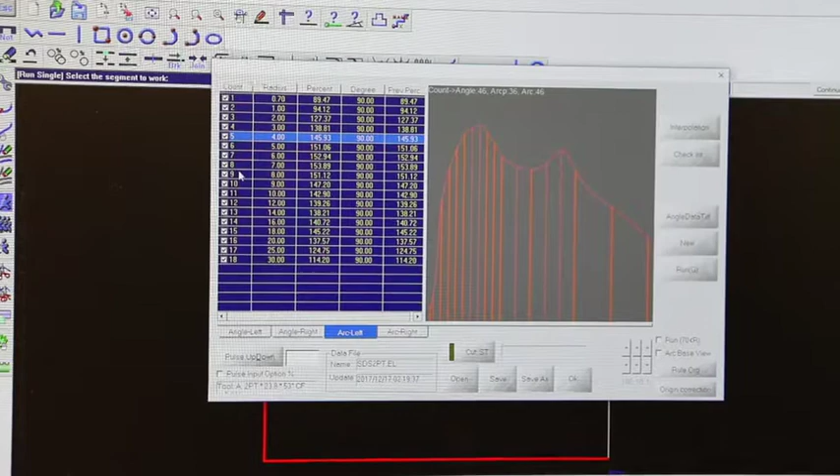If you have any radiuses greater than 50 millimeters, you don't want to run those because it'd be huge and you'd have a hard time measuring them. But you go ahead and get them all selected, and just like before, you come right over here and hit run, and it's going to run all of these radiuses in order, and I'm going to make sure I take them off the machine in the order that it comes off.

Here we are—it ran all the radiuses for me. I kept them in the order that they came off of the machine. I'm going to go ahead and set them down right here and get ready to measure them and put into the screen what it actually gave me.

So what we do is take the first piece off and measure it. What we want is, if it got the radius right, it'll be exactly 90 degrees. Whereas before with the angles, you were reading the actual angle it gave you. In this case, doing arcs, you're in this 1, 2, 3, fourth column over where it says 90 degrees all the way down. If it got the radius right, it'll read 90. If it didn't get it right, it'll read either under or over 90. Then you input what it gave you.

If it gave you 93, you put in 93. If it gave you 88, you put in 88. So I'm going to look at the first one and read it, and it's exactly 90, so I don't need to do anything with it. I start out here by clicking it at the top so that it's on the 90. If it looks good, I just hit enter, go on down to the next one, grab it, and let's see what the next radius should be.

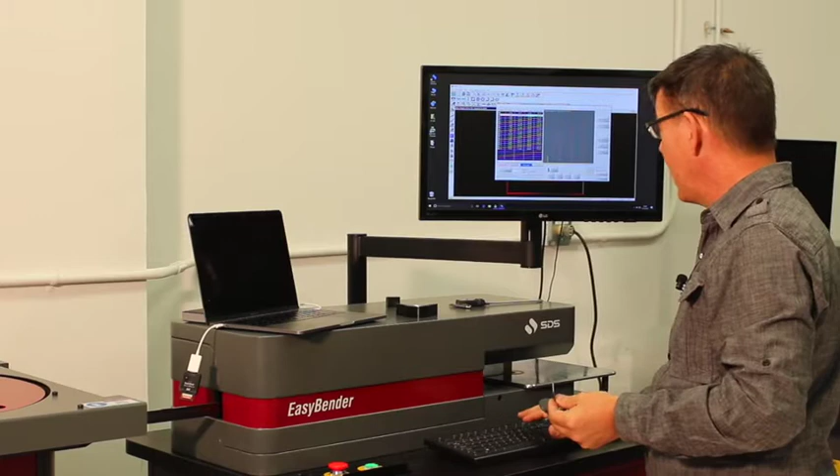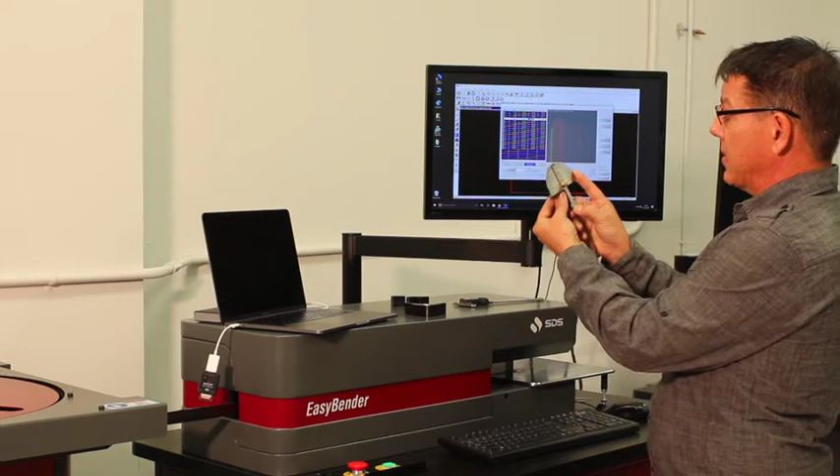Of course, it's going to apply more pressure the next time we check it. Go to the next one, and it should read 90, but it reads 91, so it's overbending that radius just a little bit. I'll enter 91, and it automatically takes some pressure off. You just go through the sequence, keep reading what it gave you, 93 on this one, and that's what you do all the way down.

We're going to go ahead and finish, and I'll have you join me here in just a little bit. Well, there you go. We've done angles to the left and angles to the right. It's pretty simple and straightforward, and you just keep repeating the process.

Now, how often should you do this? The more often you calibrate, the less time it takes. If you wait 6 months or 12 months, which I'd never recommend, these pressures are going to be off greater distances, and it takes longer to run and rerun and check and double check all your pieces. If you calibrate once a month or every other month, whatever sequence feels good for your shop based on how much you use your machine, your calibration time is cut way down. Your machine will run better, first parts are off, and you'll spend less time actually calibrating.

Well, that's it. That's how we teach angles and arcs. Let's move on to the next section.

Okay, there we go. I've run through all of my radiuses, all of my arcs to the left. Now, before I jump over to the right, take note of any radiuses or arcs that weren't correct, where I had to tell the machine you were under or over that 90-degree mark. It automatically left those checked because I had to introduce new data, and it unchecks the ones that were correct. So it automatically did the interpolation for you—you don't have to do that step anymore. Over on angles to the left and right, you needed to do interpolation; over here doing arcs, you don't need to, it's done automatically.

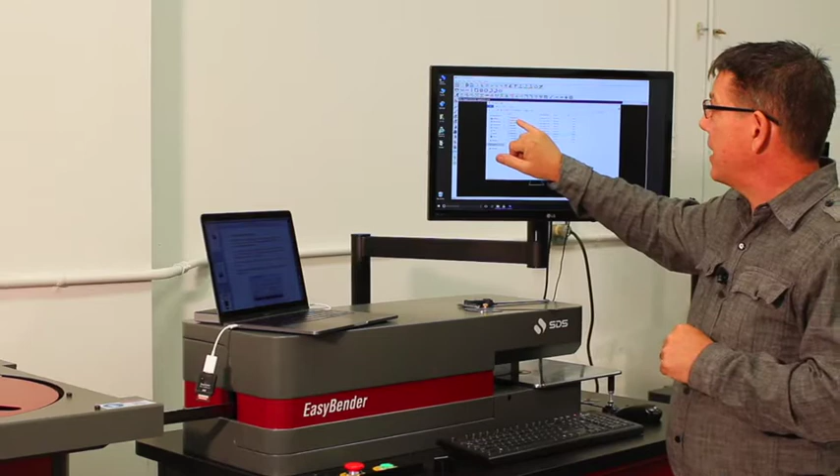The way you do that is you need to burn a board on a laser. We've given you a file to do this test with. Go to your local hard drive, look for the EasyB folder - that's EasyB like boy. Open the EasyB folder, and inside there you'll see a folder called DAT, D-A-T, data. Open the data folder, and right there you'll see a file called testbend.

Go ahead and open that file on your EasyBender - I've already got that right here. Here's the testbend file for doing elongation constant. As I mentioned already, you want to have this laser burned.

Now, when you laser burn this - I say it because it's important - your laser needs to have a good quality kerf. You want to make sure your laser's tuned up too. Make sure that the kerf is perpendicular, that it's not bent. Well, you don't bend a kerf, you know what I'm trying to say - that you've got a good laser burn board.

Because if it's not right, it's going to affect your test results when you get to the EasyBender. Now that I've shown you where the file is on the C drive, it's as simple as opening it up into your EasyBender software, and of course you've already had this laser burned. It's really important that whatever laser it's burned on, that laser's tuned up with a good quality kerf. You don't want a kerf coming in at an angle, not being blown out at the bottom or too tight at the top, because that'll affect the test results. So a good quality burn board is really important for this test.

So you'll go ahead and get this file up, and you'll want to run these pieces. I'll take you through the mathematical computations of what to do after you've run these pieces and what to do when you get them inserted in the die board.

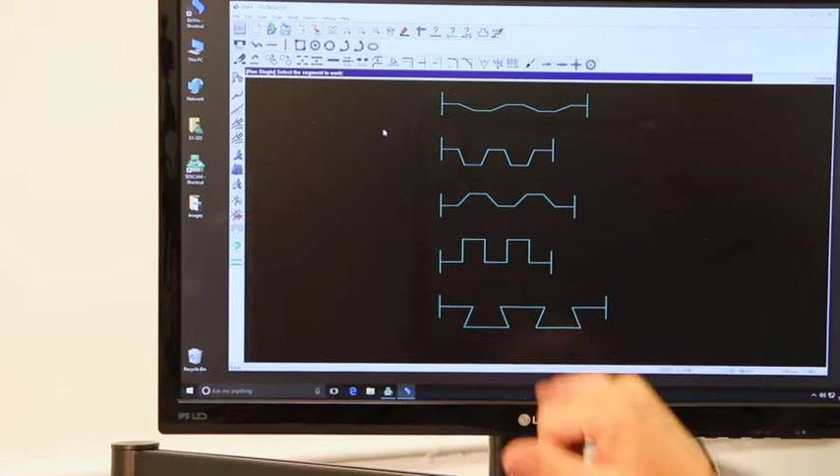Okay, so now that you've got your burn board done and you've run these pieces off of the bender, you want to go ahead and insert the 90 degree into the die board first. Now when you are running this, you also want to run these end pieces. When you run these, the short pieces here are straight cuts on the end, but when you run these internal pieces, you want to do it miter - you're going to be mitering these pieces onto these side pieces all the way down. So that's important to do.

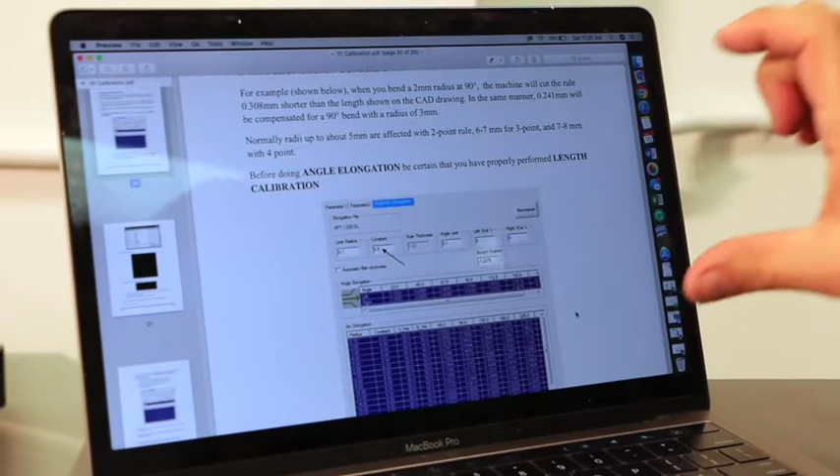Now here inside of the manual, the PDF, we're in the elongation constant section, and you'll notice it says: before doing angle elongation, be certain you have properly performed length calibration. Of course, which we already did - that was the first sequence we did. It's very important that this not be done unless you've got an accurate length calibration, or you'll be chasing your tail all the time.

Once you have that 90 degree piece in, you want to check to see if there's any gap between the end of the rule, the miter piece, and that little tiny piece. Said another way, we're looking to see is that miter running long or short? Is the body of the rule pushing in or is it pulled away? If it's pulled away, there's going to be a gap where it's not mitering on properly. If it's too long, it's pushing those pieces out.

That stretching is either being overcompensated or undercompensated for, and this is where we can make some small adjustments to whether or not it's running long or short on the miter. And we're checking the 90 degree piece first.

What I want to show you now is have the camera come over, and we're going to look at the PDF of our training manual, and I want to go over the mathematics with you of how to compensate if it's running short or long. So we find that here by scrolling down, and you'll see this is taking us through the sequence of how to open the file, where to find it.

As I'd already mentioned, you start with the 90 degree, create that rule path. And it's very important, as it says in the manual, that when you create that, you've got no extra rule at the start or the end. It's got to be 0 zeros when you're running it.

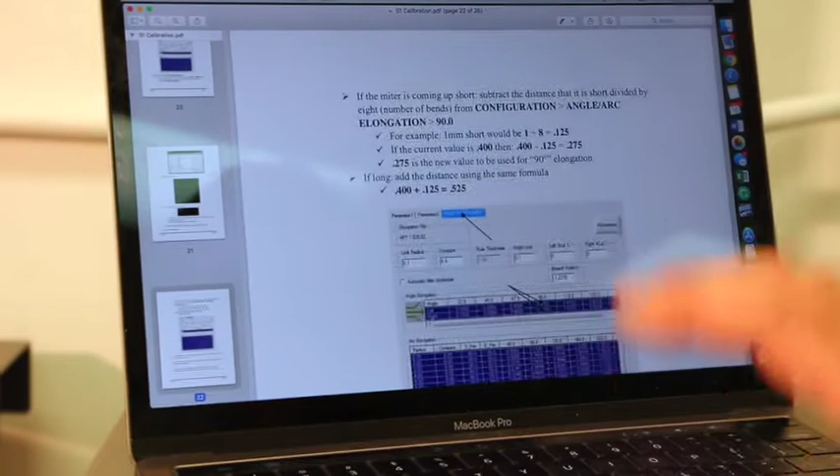So you go on down, and as I was stating earlier, you're looking for either was it running long or short. So it gives us some examples here. For example, in this one, if the miter is coming up short, you subtract the distance that it is short by dividing by 8, the number of bends in the piece.

Let's say hypothetically that it was 1 millimeter short. Let's go back up and scroll. Why 8? 8 bends, 1 2 3 4 5 6 7 8. So since there's 8 bends, it grew, or was short in this case, consistently over each one. So we want to divide that into 8. If we're 1 millimeter off, we divide by 8, which would be 0.125.

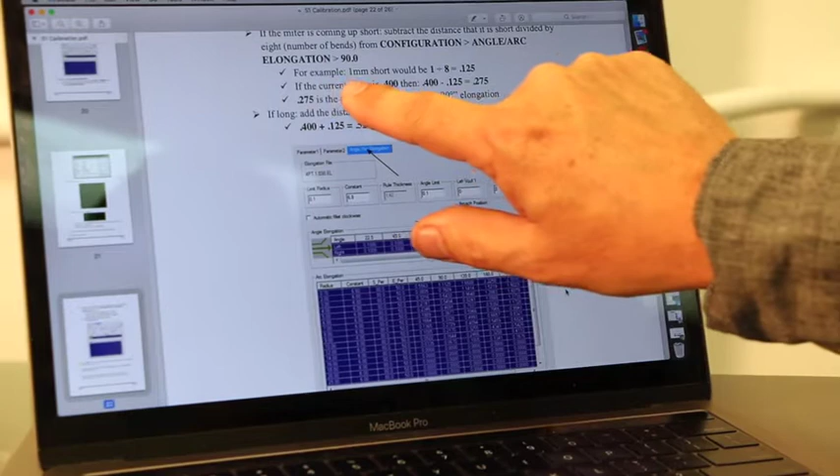So then you go down. If the current value, found here under the 90 degree column, I'll show you in a minute on the computer screen on the bender so it'll be a little bigger for you to see. So for example, if the current value is 0.4 in the 90 degree column right here, you're going to take what we got from here earlier, 0.125, away from the 0.4, so the new value would be 0.275.

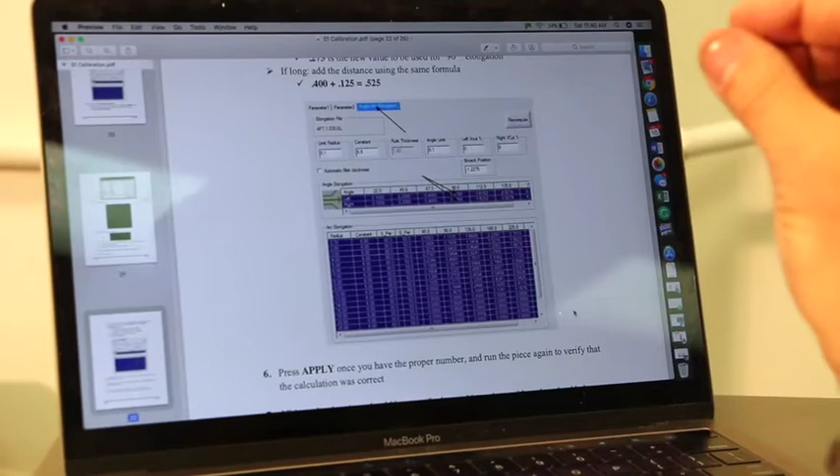0.275 - you would take that 0.275 and change that in both the left and the right side of the 90 degree, then run the piece again and verify by putting it in the die board. Pull out the old one, insert the new one, and it should be much closer, spot on. If it's not, you'll just make those same mathematical computations a second time.

Okay, I told you I'd show you where it is on a bigger screen on the bender, because it's kind of hard to see on the PDF. In order to get to the elongation area, you click on the configuration, the little wrench. It'll pop this up. This looks very familiar because this is where parameter 1 and 2 is we've been using throughout the calibration sequence. You go to parameter 2, enter the password, SDS, but now it's right here. It's the next tab to the right, angle arc elongation.

Clicking on that, you'll see this is what we were looking at in such a tiny way on the screen over there. You can see the 90 right here. This is where you would put in the new mathematical figures. Now, once you do the 90 first, you'd go in and do the next one, the 22.5, the 45, the ones left on the board, following the same sequence and same math I showed you on the 90 degree. When you get all of that in, hit apply and then OK, and you've done elongation constant.

I didn't have a burn board here to show you because I'm not in a die shop. If you need questions answered on this because it wasn't clear, just reach out to us and let us know. We'd be glad to follow up with you.

Okay, we got one more calibration to do, and then I want to talk to you about file management, and I think we'll be pretty well done. Let's move on to the next sequence.

All right, well, welcome to the end. We've got two more things to cover. I want to do section 1.6 and really just have a talk about burr compensation.

Rather than walk you through line by line on burr compensation, I'm going to refer you to the manual. However, I just want to talk about why burr compensation is important. In the folding carton industry, for example, if you're running a series of pie locks where you've got a short bend at the end of the rule and you go to run 20 of them, you may notice that by the time you get to the 15th, 16th, 17th piece, the end of your pie lock is really short, if not that last little leg gone altogether.